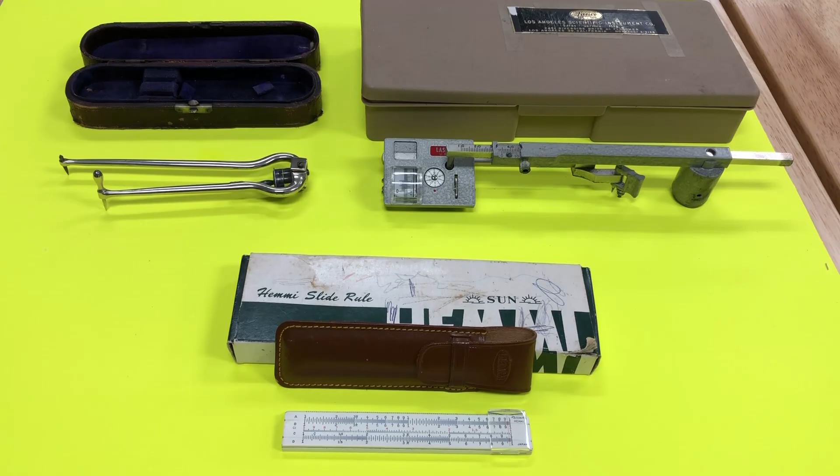Let's begin by introducing you to the devices we're going to be using today. This one here on the upper left is a planimeter from the late 19th century. It was made by the American Steam Gauge Company in Boston. It was my great-grandfather's, and he probably used it in his design of steam yachts.

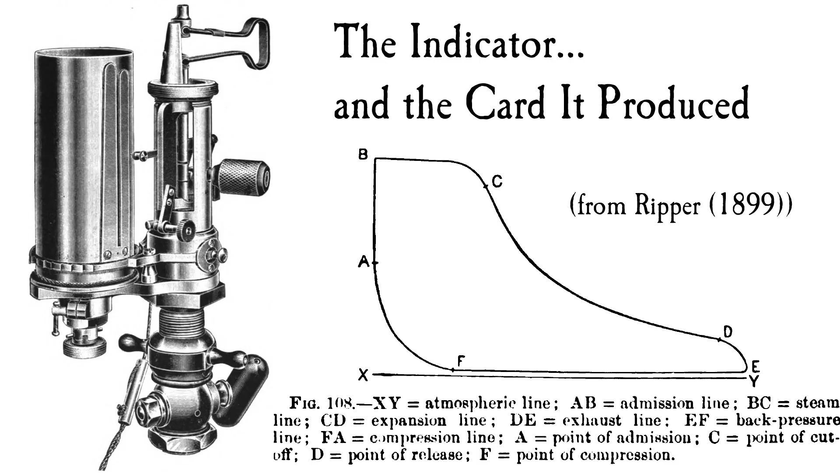As far as the steam is concerned, one of the main uses for planimeters back in the day was the indicator card. The indicator card, for those of you who are unfamiliar, gives you a pressure-distance plot, basically, of the entire steam cycle. And the entire steam cycle is shown - you take that area, you can find out what your output of your steam engine is. This is a very common use, but also he probably used it in his calculations of volumes and shapes and whatnot, because real ships have a fairly complicated hull structure to them.

So he used it for that too, probably. Over on the right here, we have a more contemporary one, probably from the 1960s. It was made by the Los Angeles Scientific Instrument Company, which was interesting because my great-grandfather's brother lived in LA for a long time and actually died there. But that was long before this came along.

The planimeter is more of a quote-unquote modern, more like you saw in the 60s and the 70s. My family business had one which was similar to this, and it has more features. For example, the one on the left only has one wheel, which records the area, whereas this one has not just the one wheel, but you can actually go 2, 3. For example, if it goes from 1 and around once, it records how many revolutions it makes, and you can see the volume. We're probably not going to get that far into that because we want to compare it to the old one.

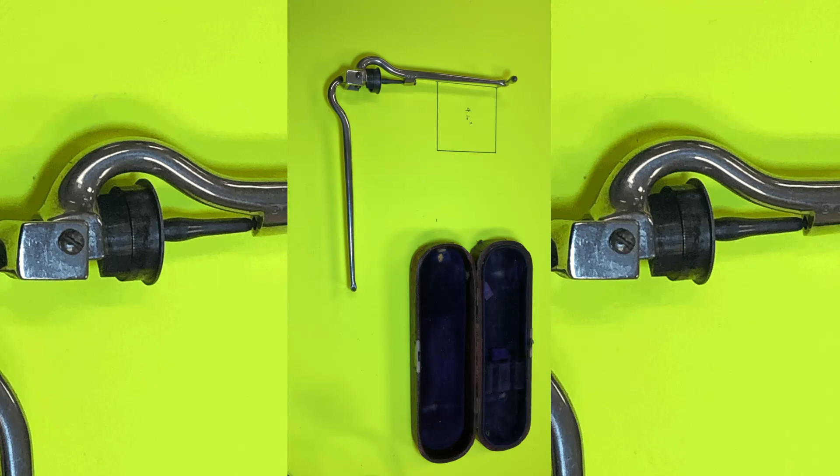Now we're going to start with the planimeter test. We're going to use a test square. That test square is 4 square inches, 2 inches to the side. That was no mean feat to draw because I introduced CAD to my family business in the late 1980s and I've been disposing of my drafting equipment ever since, but I had enough where I could do that.

So with that in mind, the way this works is this. We start here. This is at right angles to that. And we're going to trace this around the perimeter of that square. And as that happens, this wheel is going to turn and give us a result, which should be the same as this because it's a 1-to-1 scale. So we're going to go ahead and get started and move this around. As you see, my planimetry is not what it used to be, and it wasn't much to start with.

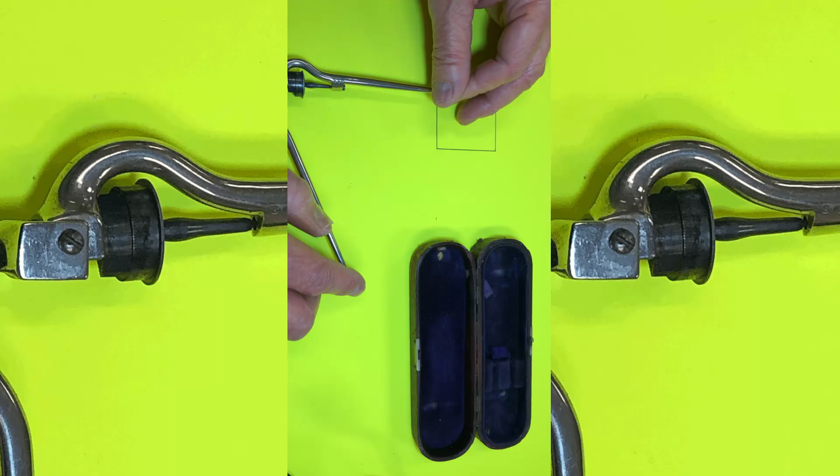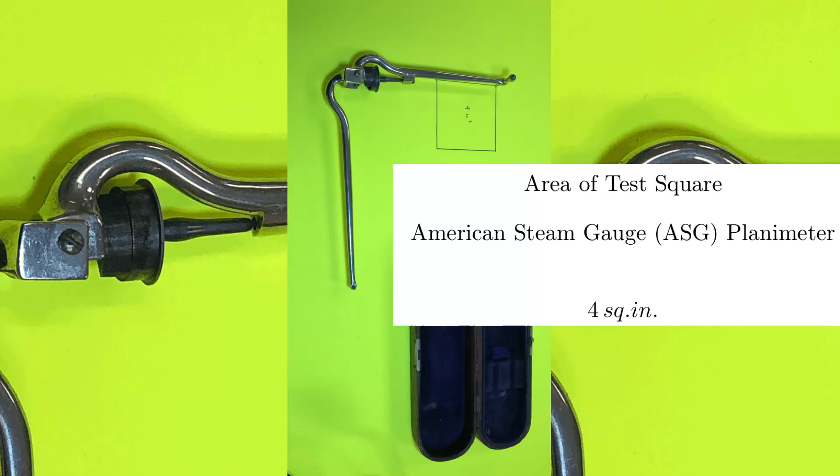We stop there, and we look at the planimeter, and it's pretty much right on the money at 4. There may be a little difference. I'm going to try to take a picture of it. That won't be easy because of the lighting and whatnot, and because of the tarnished nature, but it's just about at 4 square inches. Now we're going to do the Lasico.

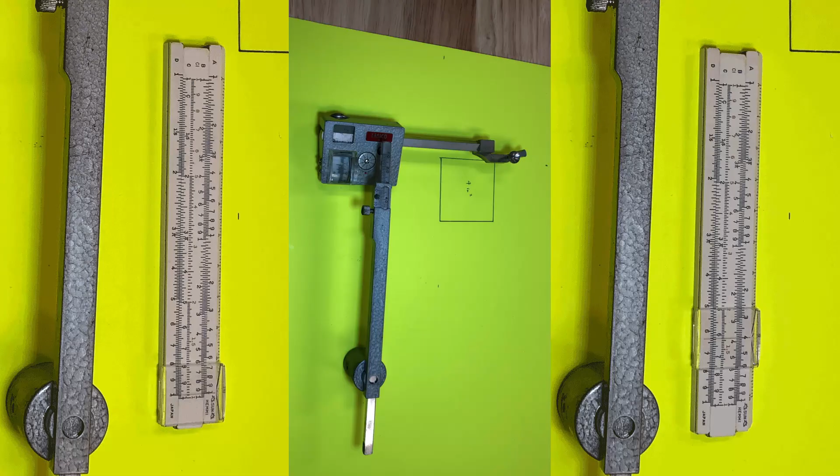You'll see the Lasico has several improvements. One of them, of course, is this wheel right here, which allows multiple revolutions of the main wheel, which is actually dragging on the surface. And therefore you could use larger areas. Obviously it's a bigger machine than the other one was. You also have it where instead of having to hold the point directly, you can actually grab onto this there, which is what I'm going to try to do. And you can then see your tracing a little bit easier. So we'll see if this gets any better.

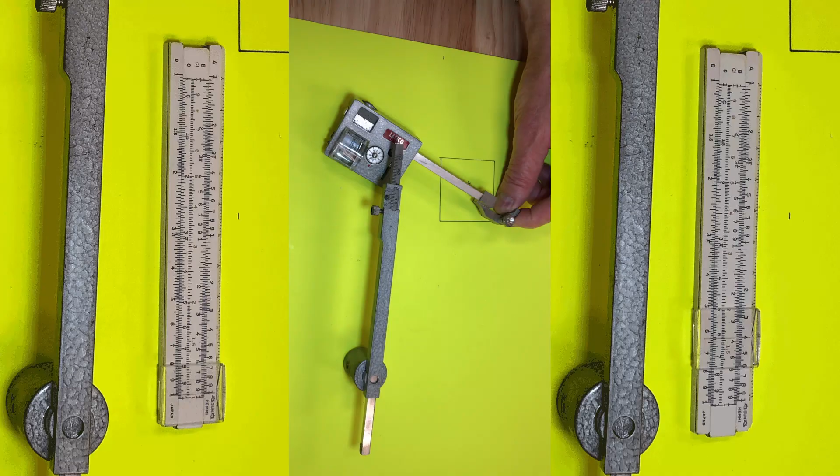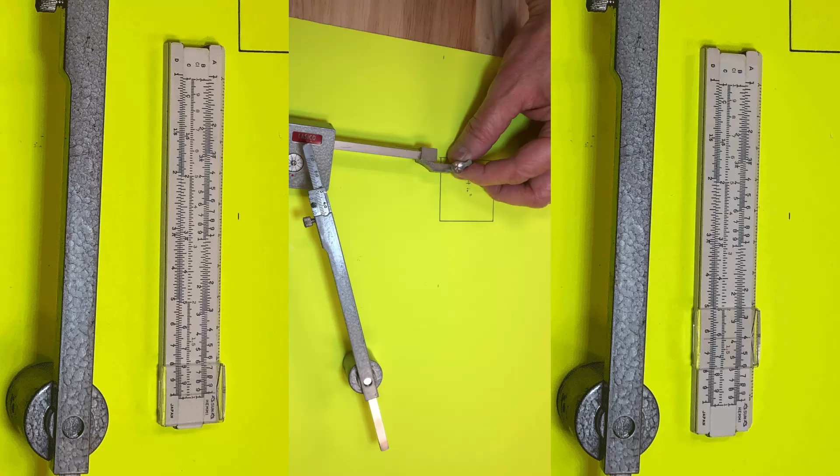Actually, it's not, to be honest with you. I find this more difficult to move around accurately than the other one. Some of that may have to do with my sorry technique, but the other part of it is I think the other one, the wheel and whatnot glided more smoothly on the paper than this one does. Then we come up.

There, we'll stop there. And we look at our results. And actually it's not quite there. The result of this is about 3.8. Now you ask, why is it off? Well, it may be, it may not be.

It may be a scaling issue. I attempted to set up this particular planimeter so that it would scale properly, and at least I tried to restore it to the factory settings. So what I'm going to do with this is, assuming that it's a scaling error and not my poor performance, which may also be a problem, and I'm not sure it's really needed in this case, but we're going to do it anyway.

We're going to take a leaf from McCormac Surveying and basically do a scale factor with this particular planimeter. And we're going to use the slide rule to make it happen. My first move was to put 4 on the A scale, and on the B scale, I'm going to divide it by 3.8, which is what you're looking at there. Now I move the cursor down to the end, and from the A scale I get 0.95 as my scale factor.

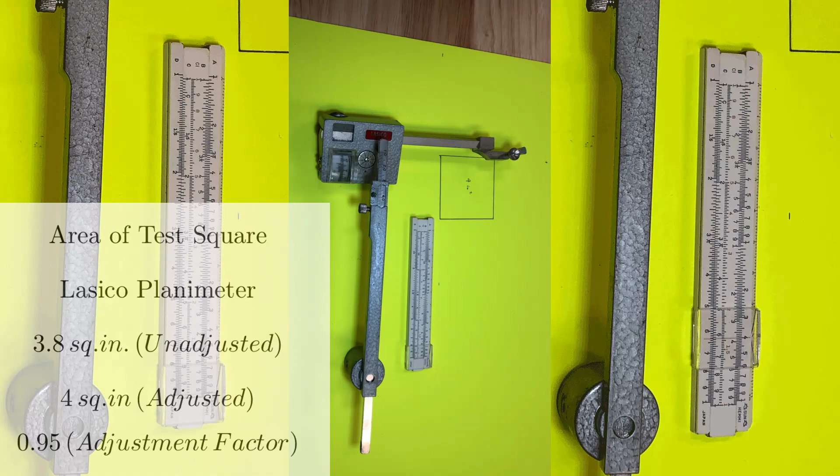All right, this is a drawing, a little more complicated than the other one, of an underwater pile hammer that Vulcan proposed to its customers in the late 1960s. Vulcan never developed an underwater pile hammer. Some of the problems were at Vulcan's, and some of the problems were in the market it was selling into. So between the two of them, this never saw the light of day. In any event,

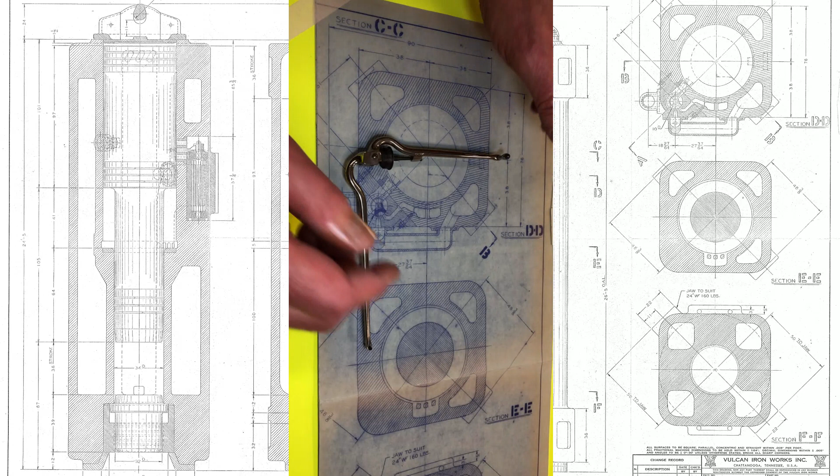we're going to actually take the area of this quarter section right here, where you see the hatching up to this point here and across these lines there, and then we will have to do some adjustments, but we're going to talk about that in just a minute, because obviously, unlike the other one, this is not the full scale, and there is where the slide rule will be very useful. So without any further ado, let's go ahead and get going with this.

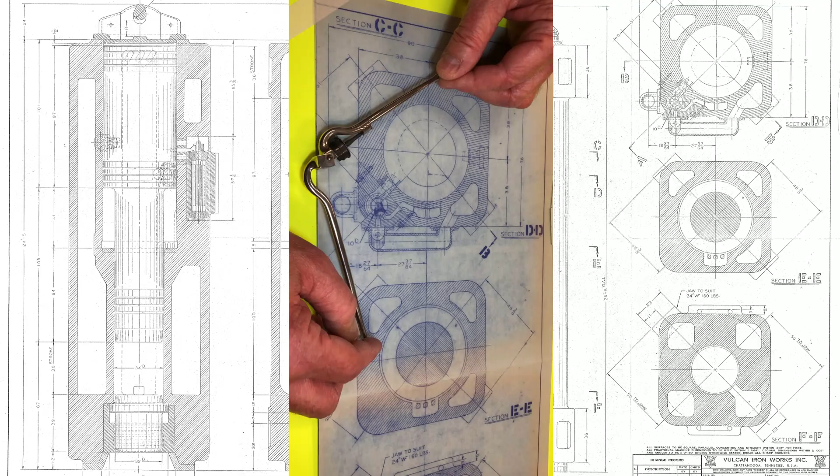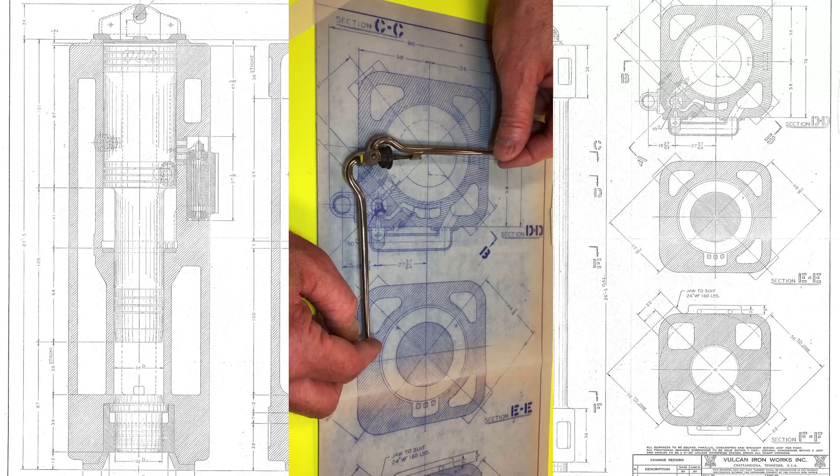And again, one thing I've tried to avoid is the planimeter going off of the paper. In other words, going from the paper, say, to that yellow background, or from the yellow background to the table that they're all taped to. The result of that shows that that area is about 3.5 square inches. That's in real units. We'll get to how we get it up to the scale in a minute.

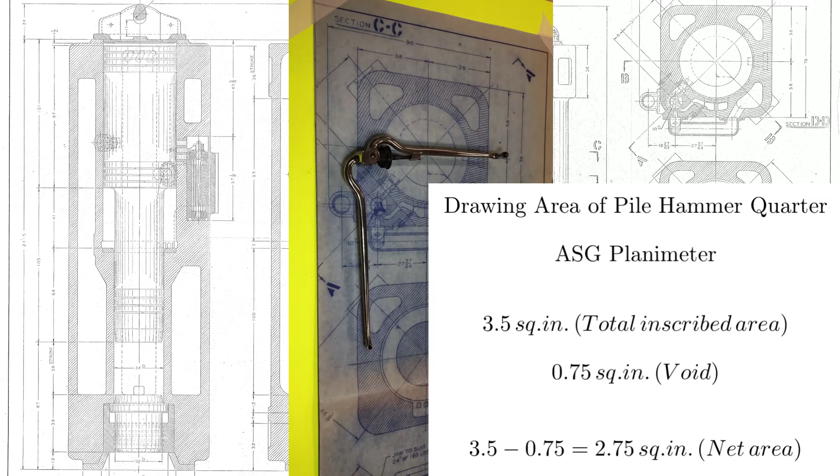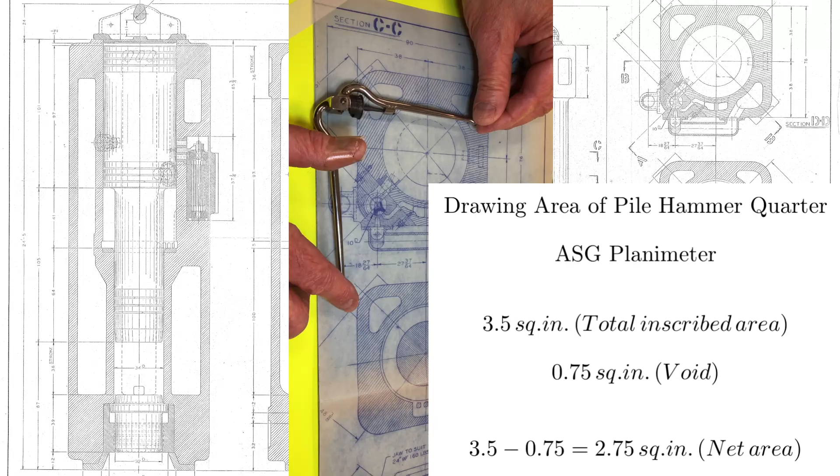Now we're going to change gears a little bit and take the area of this void. And here we go. We start here, we trace it this way, around this corner. The fillets obviously can be done by hand, but this whole thing could be done by hand, but we didn't. Okay, we stop there.

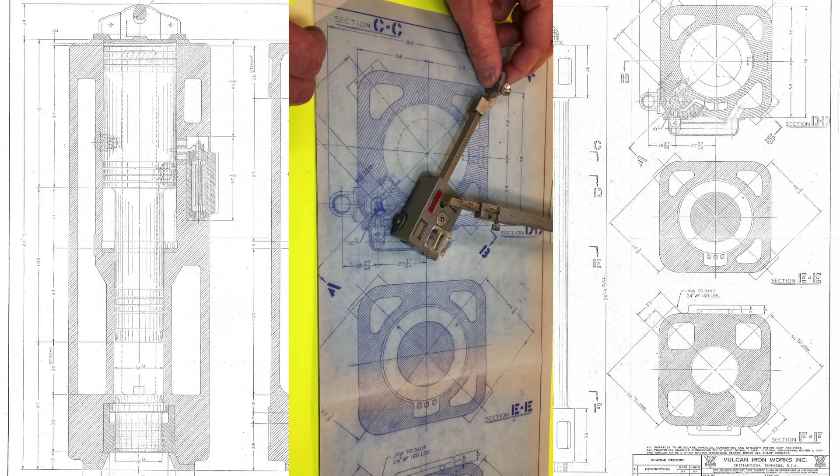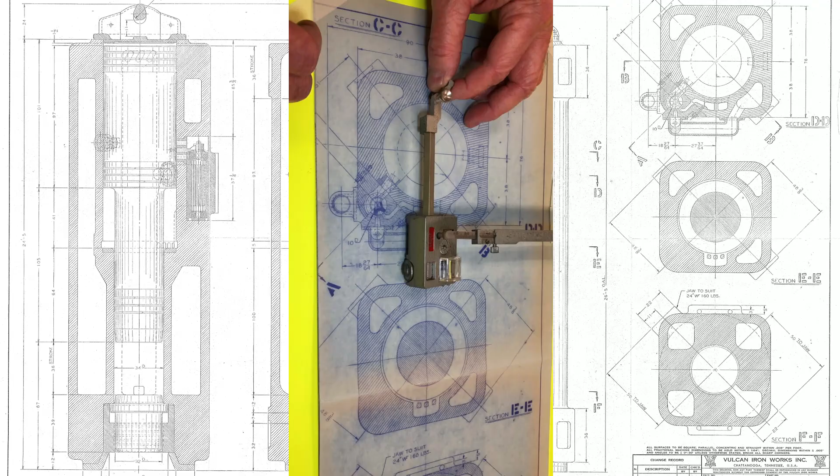With that, now we got the Lasico set up. We're going to start working it this way. And we got this problem. Okay, and we ended up with just about four square inches unadjusted.

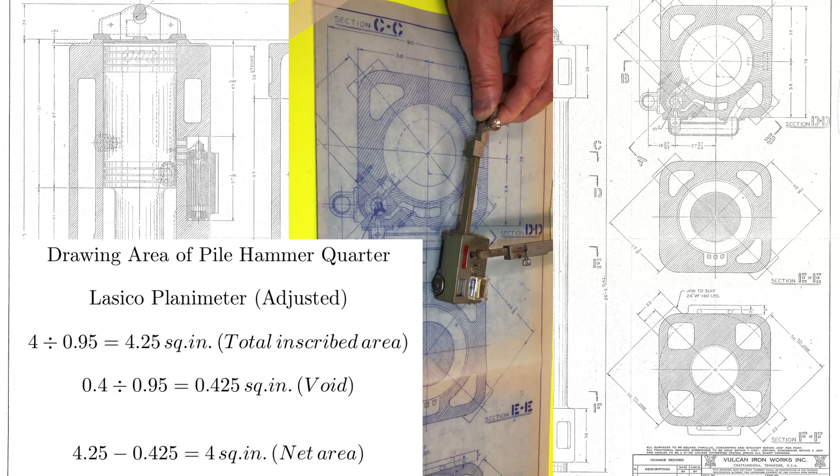Now we do the Lasico in the inner void, and we've reset it to 0 and all that good stuff. So we come around. And we check, and it has about a 0.4.

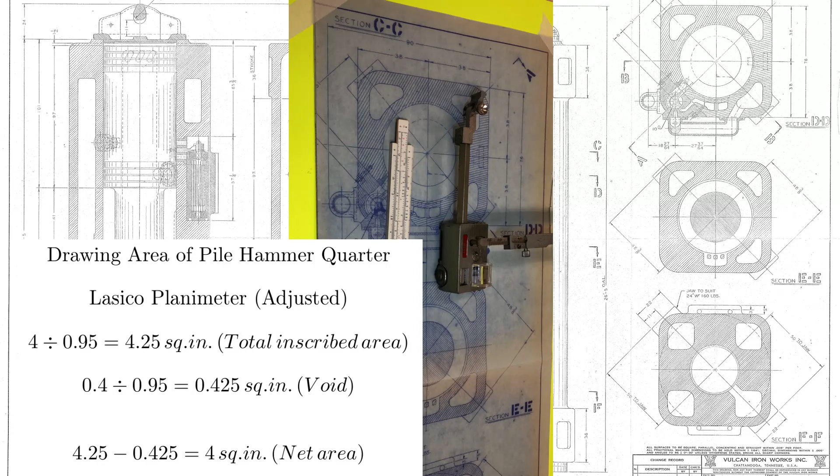And we'll make those adjustments by dividing both of those using the slide rule. The slide rule basically says 4.25. And actually it will be 0.425 for the void on the Lasico, because it's 4 and 0.4, so 4.25 is going to be 0.425. One of the things that was necessary with the slide rule in the old days is to know how to shift your decimal point around properly in your head, because the slide rule helped you, but ultimately it was you that had to keep up with the powers of 10.

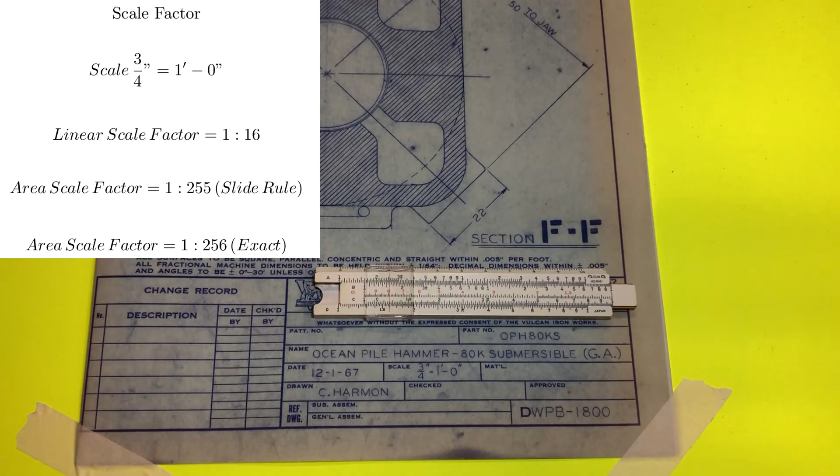The drawing originally was drawn at 3/4 of an inch to a foot. Now, I went through some long addition and multiplication to come up with the fact that basically 1 inch is equal to 16 inches. That's for length, but that doesn't solve our area. The slide rule there shows you that I have multiplied 1.6 by 1.6 on the A and the B scales, and I get about what looks to be 255. Well, 16 squared is 256.

So now that we've gotten the scale factor established with reality, let's go ahead and find out the net area of the shaded area, which we determined the scaled area of. So let's start with this. The scaled area of the American steam gauge is 3.5 minus 0.75 or 2.75, and the Lasico at 4.25 minus 0.425 or 3.825. So we've got a fairly wide divergence of results between the two, and so we have to figure out what's going on here.

What I think is going on is this: the Lasico, I had to do a lot of cleaning up on. First of all, my technique is not the greatest, and it's worse with the Lasico than it is with the ASG, which is something you can see in the video. But the other thing is that the Lasico had a lot of cleaning, and I'm not sure whether that process is as complete as it should be. I'm not a planimeter repairman, so I'm not sure whether the results are particularly inspiring.

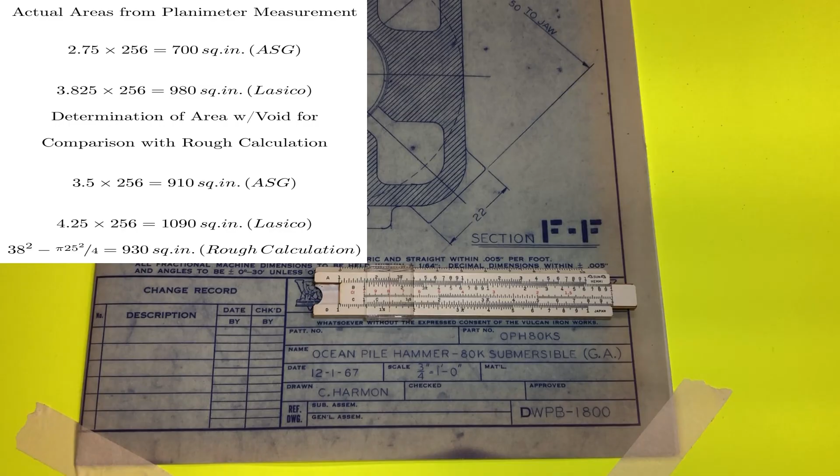The American steam gauge results basically is 2.75 times 255 or 256, comes out to about 700 square inches. The Lasico's results, 3.825 by 255 or 256, results in about 980 square inches. The obvious question is, which one is closer? With this irregular of a shape, that is difficult, but we're going to try using the slide rule.

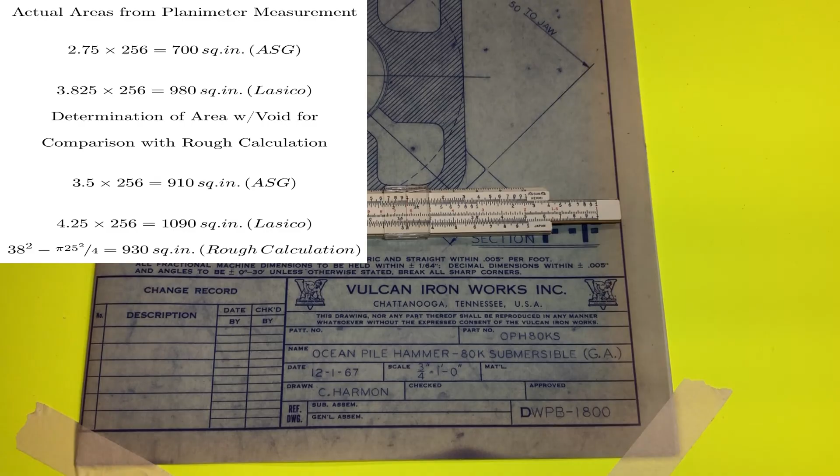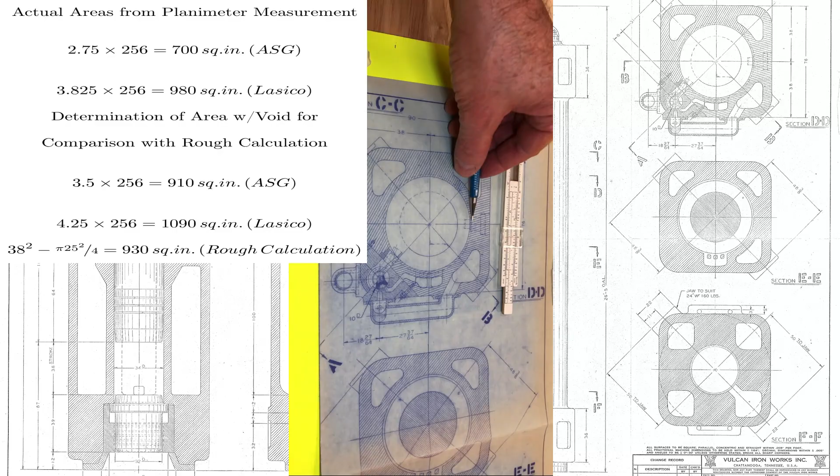Let me try to summarize the calculations. What I did, I took the area here, then around, and actually took it out to here and then down. And I did not try to estimate the area of that. I wanted that area. So basically I started with a quarter area here, which is pi r squared over 4. The diameter of that is 50 inches from another part of the drawing, so that reduces that to 25, and you multiply all that out, you get about, and I used the slide rule, 510 inches squared.

The slide rule part of that is really intriguing. This slide rule has a place for pi on it, and that's what I used. It makes it a lot easier when you're doing area and volume calculations on circular stuff.

From there, the area of this area right here is 510 inches. And then this square area, 38 by 38, comes out to about 1,440 on the slide rule, exactly 1,444. So we subtracted the two: the area of this square minus this circle is about 930.

If you scale up the results of each of the planimeters, with the American steam gauge you get 910, which is fairly close, and the Lasico is 1090, which is a little bit off. That is the result with the correction factor which we developed for the Lasico to start with. So the American steam gauge came out better. And again, my comments about the condition of the Lasico: it probably needs some more cleanup and probably needs a better calibration than the one we gave it.

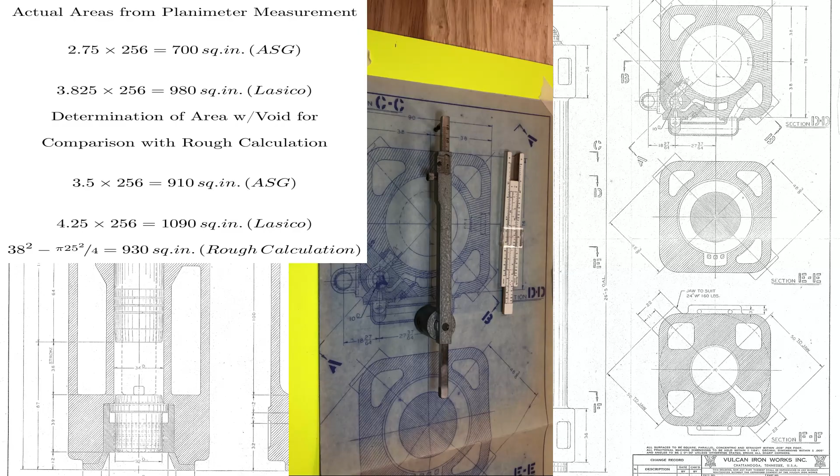Nevertheless, all the calculations you see were done on the slide rule or by straight up hand multiplication and addition. The slide rule view you see there shows the pi, which is actually computing the area of this area right here. The pi is very handy on the slide rule and was very useful in getting results.

Except for whatever hand multiplication and addition I did, which I used mostly to check the slide rule on the squares and that sort of thing, the results were pretty much the same in both, within a decimal point. So the slide rule was very, very useful. I probably would have done better if I had had more practice with it. One of the obstacles I had with the Hemmi slide rule is that the instructions were thoughtfully delivered to the United States in Japanese. I think some time with Google Glass will probably fix that problem.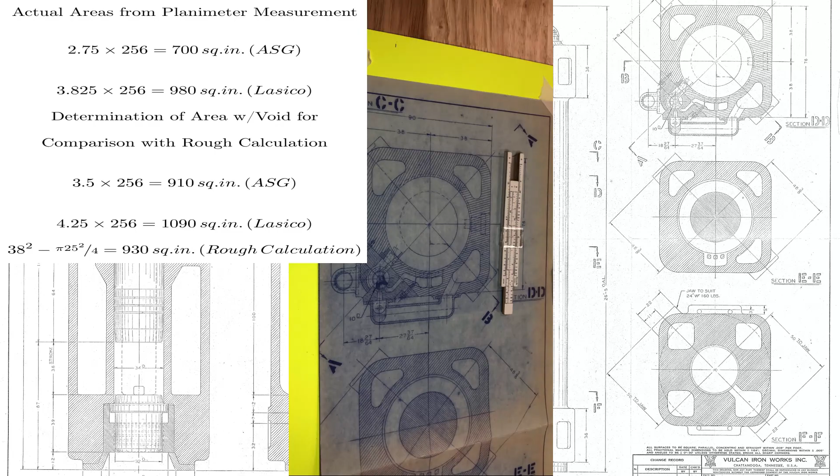So that, in a nutshell, is showing you the slide rule and the planimeter in real applications. I hope you have enjoyed this video. I enjoyed getting into this stuff which I have not used in a long time, and hopefully it'll give you a better appreciation of how things were done in the past.

In retrospect, it is amazing how many things, including the bridges and the industrial products and even going to the moon, were done with technology which we consider primitive today. So we need to stop and think about it. It's also interesting that many of the older techniques did not have the precision that we are used to now, but their accuracy, because of the people who were doing them and the application of engineering principles, was sound.